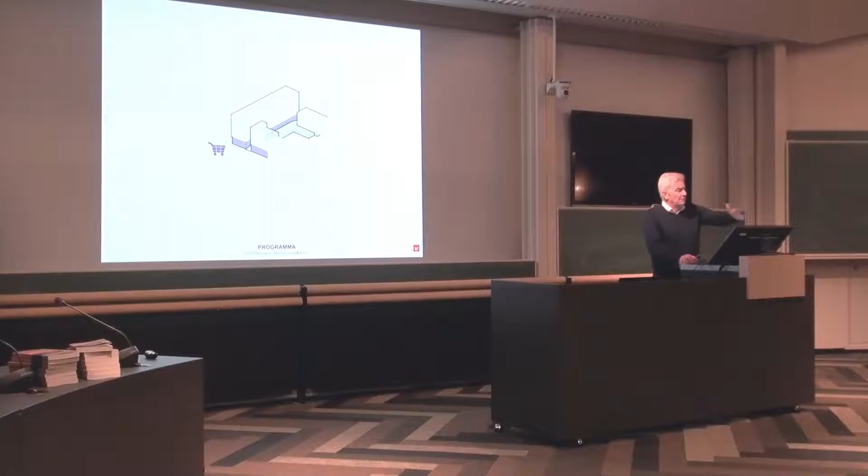And in this green area, everybody should meet everybody. Then we have a commercial plinth, so we want to have some functions down there for the people who are living upstairs.

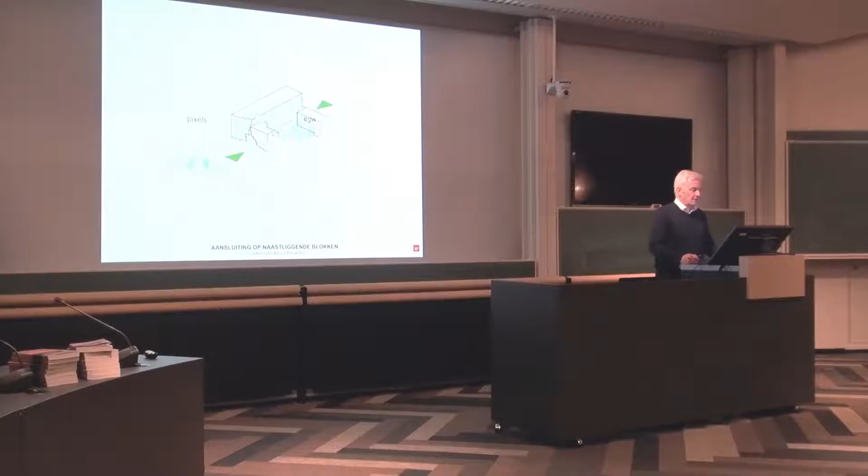Then we want to separate the bikes and cars from the pedestrians. And we need a connection to the blocks beside. And then we have different kinds of housing and apartments.

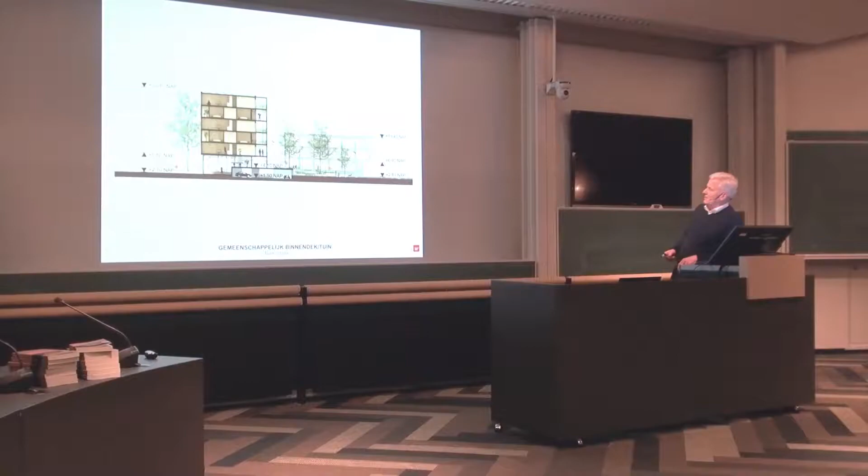Here you see the section. You see the parking, and the parking is half in the ground. So we can use this as a kind of mezzanine in the commercial plinth, so that we can combine this. Of course, it's energy neutral, and these are the floor plans.

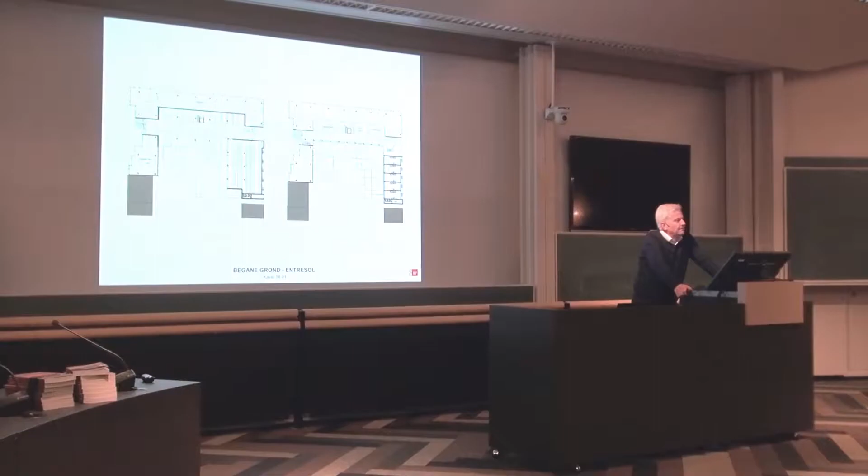I think it's very easy to read this. We did this with a developer who was a custodian. He said, okay, we take care of this block for 30 years. And if the revenue is above 7%, then we started the foundation.

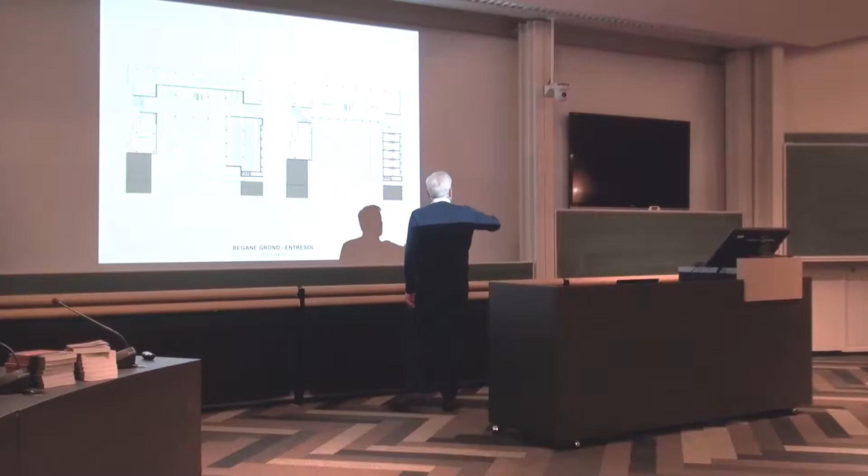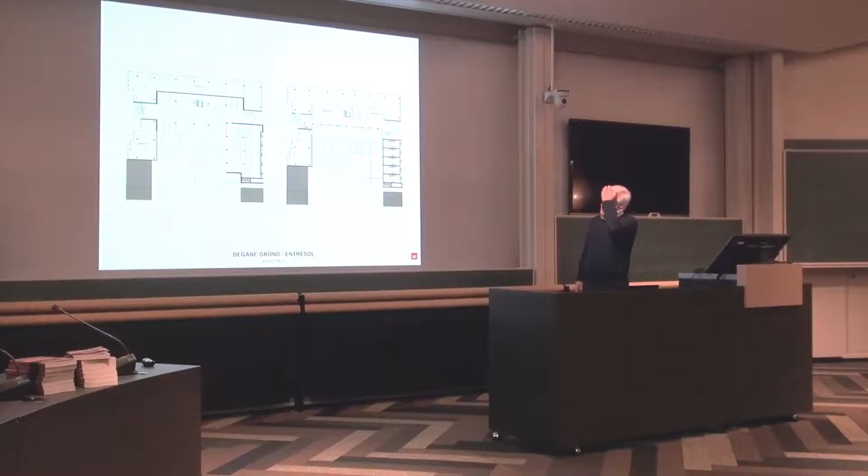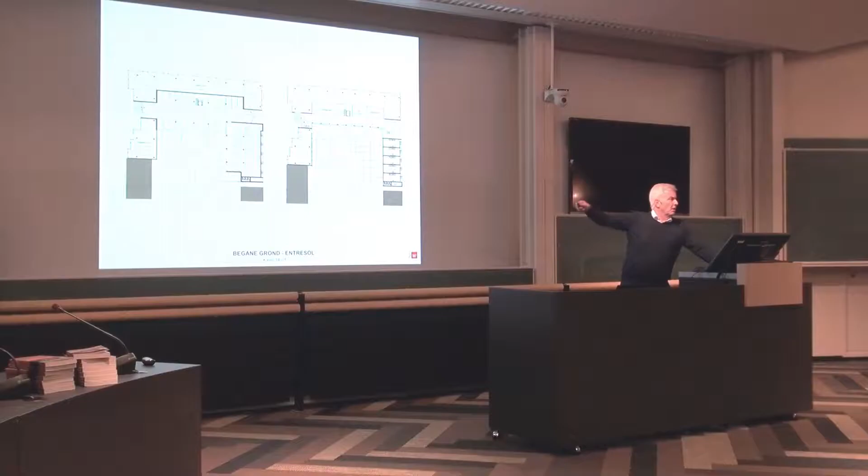So we create a foundation for everybody living in this block. If you're there, you're a member of the foundation; if you leave the block, you're not a member anymore. And if the revenue is more than 7%, 50% of it goes to the foundation, and 50% is for the developer. So they earn money in this block, and then they can create more and more value through time because the revenue is higher.

So we have different kinds of apartments. These are modular, a kind of modular system. Of course, the city, everybody talks about circular, whatever. We all use these words and mostly don't know what they mean. But now everybody is circular, and they said, okay, so we have to serve all these aspects.

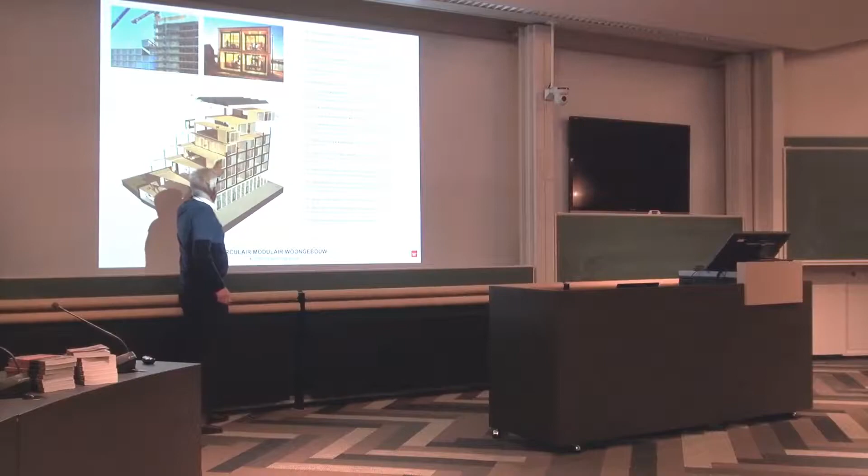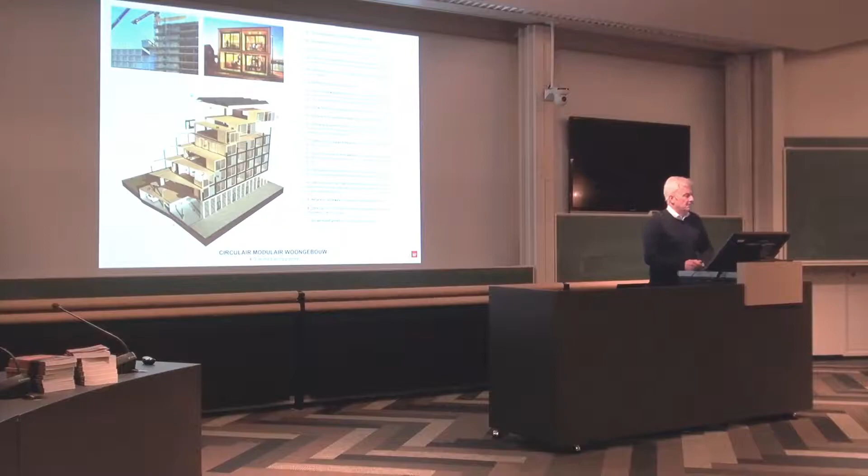And here you see the system. It's a modular system, so it's a wooden construction with a concrete floor, because of the fire regulations. And these are all the different things we realized. So it's a very simple system.

This is from the inside. This is from the garden side. This is from the outside, and this is the entrance. You see here the commercial plane, and here you enter, and here you can go through the block, through the green area.

The EPC is here minus 0.34. So this is far away from what you really have to do right now.

Now I come to another project, a very small one we are just working on. It's called Bird's Eye, a kind of watchpoint for birds in Haringvliet. It's in the southwest of the Netherlands, and it's a Droomfonds project.

And you see, it's a beautiful landscape. Of course, to make a building here is not a good idea, because then you destroy the quality you're coming for. We have beautiful birds here, the Grote Stern, and they come from very far in the north, and then they have a break here, and they put their eggs, and then they move, and then they go to the south of Africa, and then they go back.

So they're halfway here, so it's a very famous point to have a look at these beautiful birds. We have different other birds here too, so we should create something for all these kinds of birds without destroying the landscape. And then it's the question how to get there.

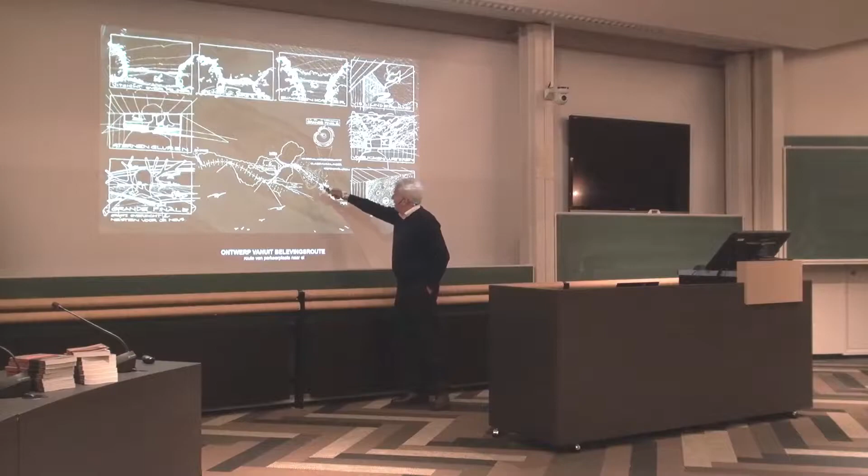So these are the drawings. This is the island. We put it here on the end of the island. So we have a tunnel here. You go through a tunnel so that the birds don't feel that you're there. And then you end up in a very special construction.

And you will end up here in the egg. You see here, this is a tunnel, and this is a harbor. So the entrance is somewhere in the harbor, and then you just go through the whole area, and then finally you will enter a very special building. The very special building is an egg, so you have a lot of experience on your way to the egg. And this is an island where the birds are, so you come very close.

This is the elevation of the building. And of course you're using all kinds of different natural materials.

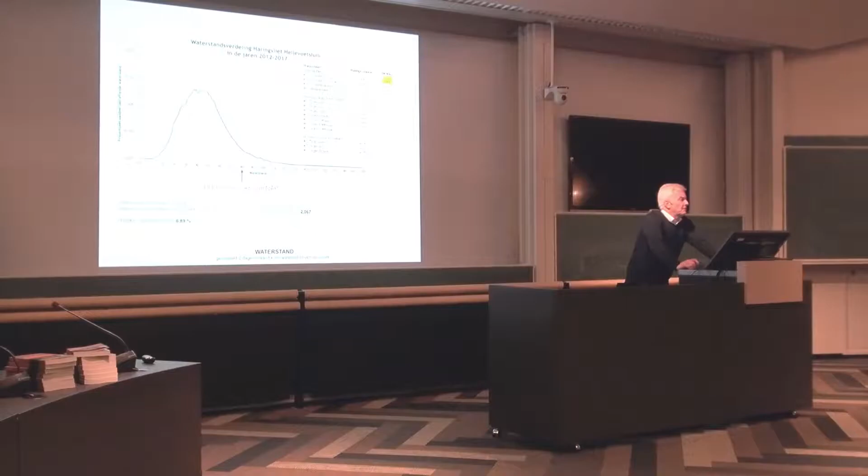Then we have the point, so when can we make a building? What is the best time? What about the water? Because the water is moving. So we have to finish the building now in, I think, 10 days. And we'll open the building on the 30th of March.

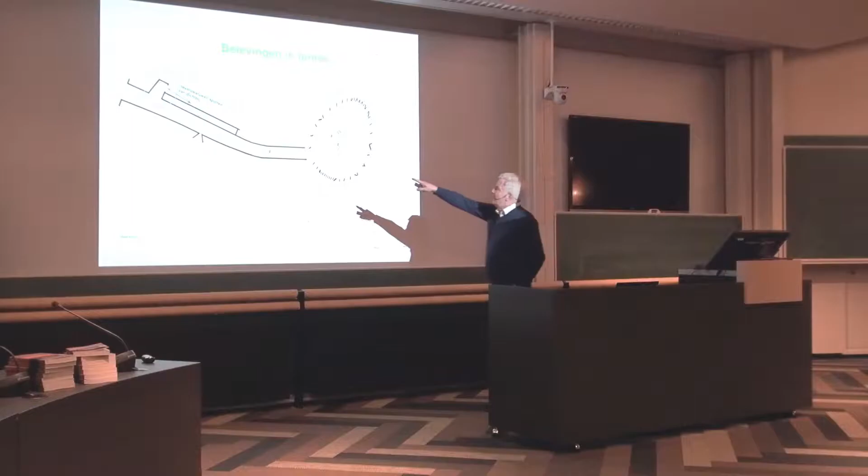But the question is, how can you create a building there? And these are the special places for the birds. They are here, they are in the tunnel, so you can have a look here. So you come very close on one side to the birds.

So opening, this is the section, this is the tunnel you go through to get to the observation area. And this is the observation area. We have a platform, a small stair house, a bank you can sit in. How can you create this and have a look at the birds without disturbing them?

So we said, okay, let's make an egg. And we create a kind of nest where we put the egg, and the nest is here. Down there we have water, and then we make this kind of egg, and in the egg you have a platform, and then you can have a look at the landscape.

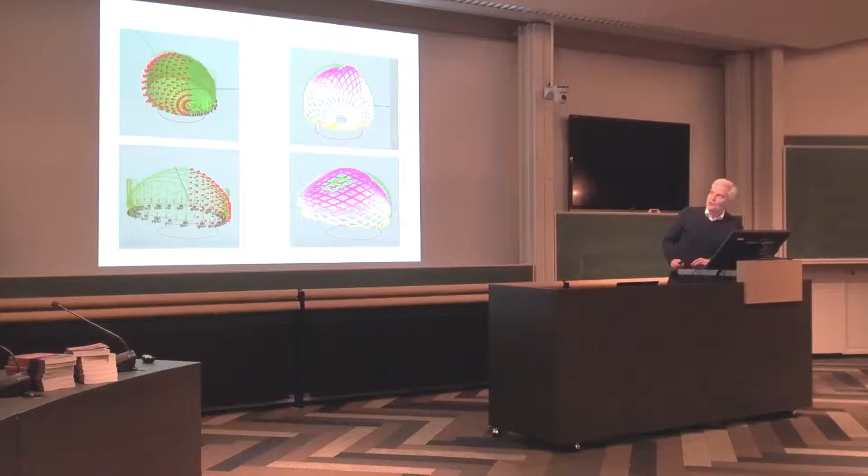It's very interesting if you ask a German construction company to look at Dutch constructions - mostly they say this is really impossible, that doesn't work. If a Dutch constructor looks at a construction from the Finnish people, they say it doesn't work, it's not allowed. So we worked with the Finnish construction company, and they allowed everything, and we ordered the whole egg in Finland. So this is the construction, this is the egg, it's still an artist's impression.

I think we ordered 1,100 of these wooden stakes. They're all numbered, they all have a code. They were cut in Finland by a special computer program - it's a kind of Lego system. They put it on the boat and bring it by boat to that place, and then we have to build it up.

So you see here, this will be the island for the birds. This is our working site. Here you see the tunnel - it's on the ground, and then we fill it up. The platform, and then we start the Lego system. And then you see here, these are the connections. It's a completely dry connection, so you can disassemble it at every moment.

So this is the front, and now you can imagine the egg growing and growing. This is a path in the building. That's the egg from the top, and now we have to cover it up. And now you see this is a place where you can have a look at the birds. It's very small, but there can be a lot of people in the egg, and they are not seen by the birds, so they can have a look outside.

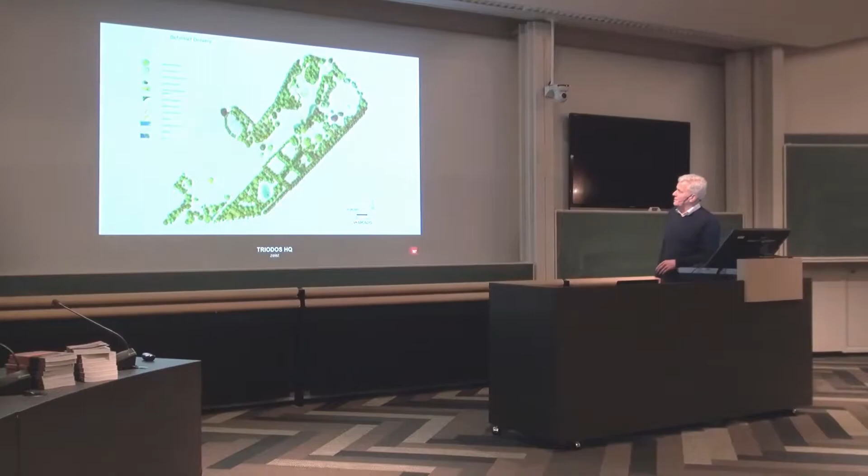So this is the whole site. I think there's a pointer here. So you see here, stop. Oh, here... it's not working?

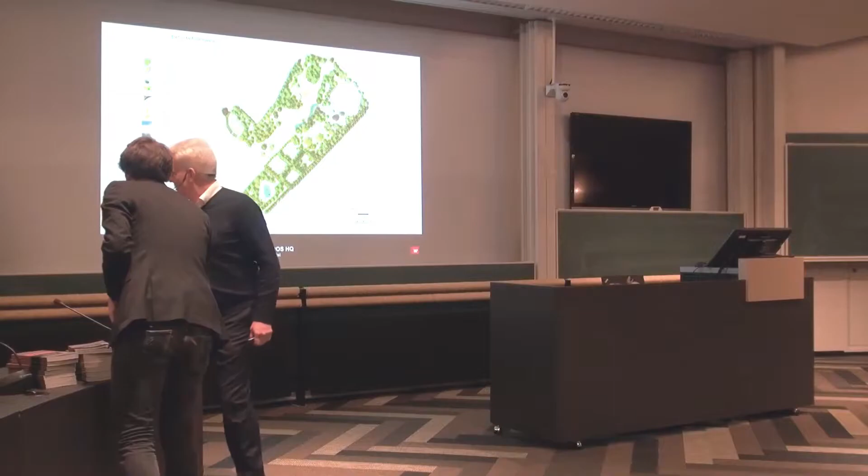It's not working? Okay, now then I try this, okay.

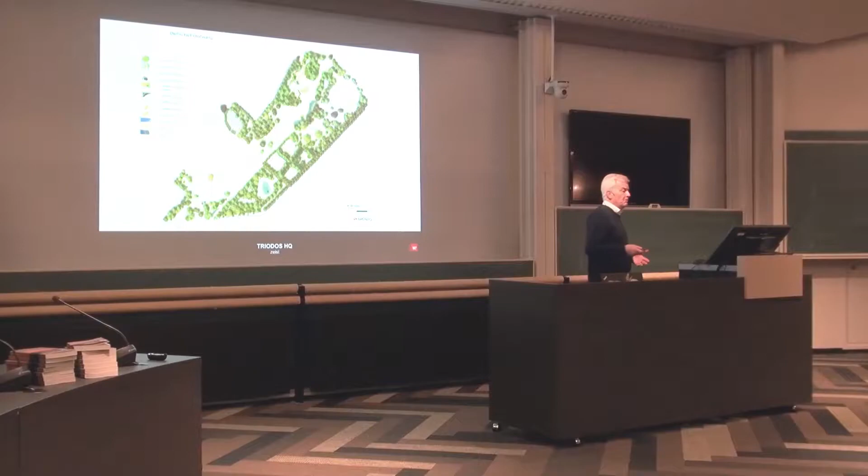So this is a bank building, this is a parking area, and this is the whole site we worked on. We made a whole program because the Triodos Bank is coming on that side. This is a little bit about the design process.

We try to find the person who wants to stay there on that side. And now you see the building, and we designed it because we have a lot of animals here, so we have to take care for the animals and for the trees. That's because of the different height of the volumes.

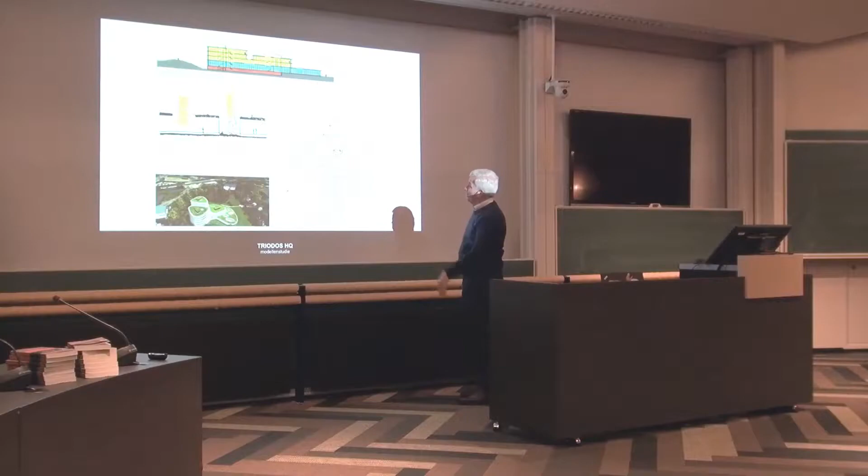This should be the atmosphere in the building. And then we have 3 levels: the social level, the public and the private level, where visitors can see the people who are working there. Upstairs it's more private, just for the organization. Down there we have all different kinds of functions.

But the question was, in 2011 we had the crisis, and the CEO from Triodos said, Thomas, we don't want to have a regular building, we want to have real estate from the next generation, real estate 2.0. We have no clue what it is, but if we don't do this, it's not a good idea that we get a new building, because there are so many empty buildings around here, and everybody's asking why don't you use an empty building? They said, we want to show what is the next step in the world of real estate.

In fact they are all the same, but the interior is completely different. And the interesting thing is it's all wood, a completely wood construction. So everything underground is concrete, and everything above ground, nearly 90%, is wood.

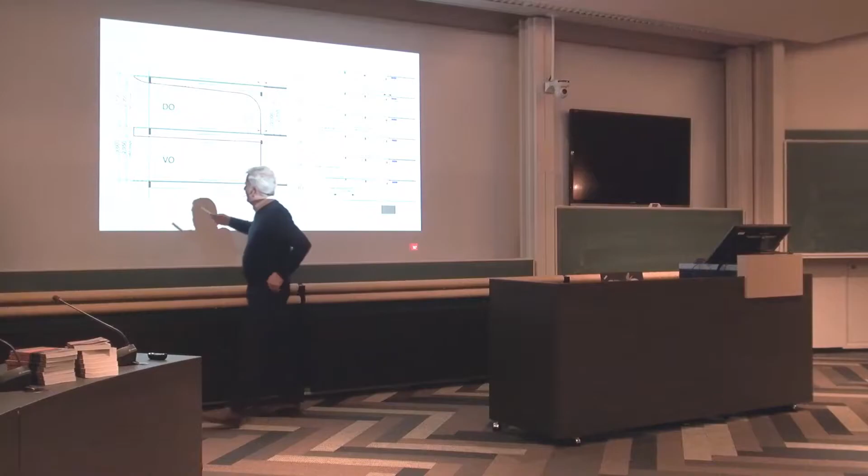That was really very interesting. So what does it mean to make a wooden building? This was the preliminary design, a kind of traditional construction.

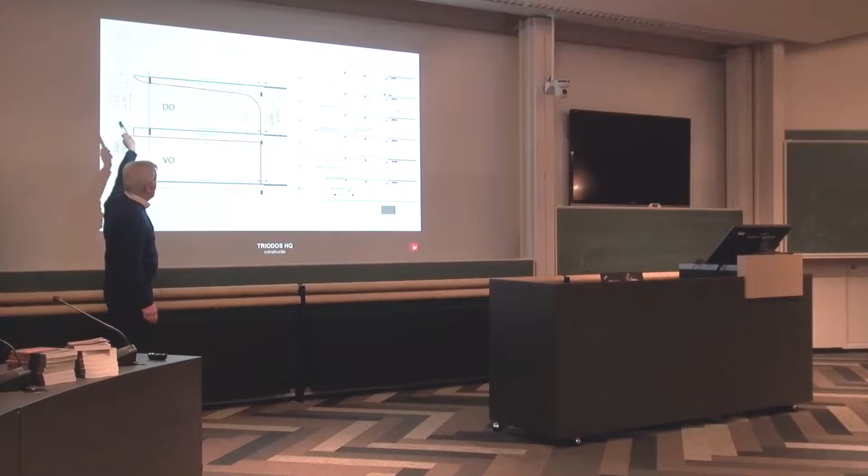Now this is the next phase, so we have a wooden construction. We said we want to eliminate concrete as much as possible in the building, and we want to bring in wood.

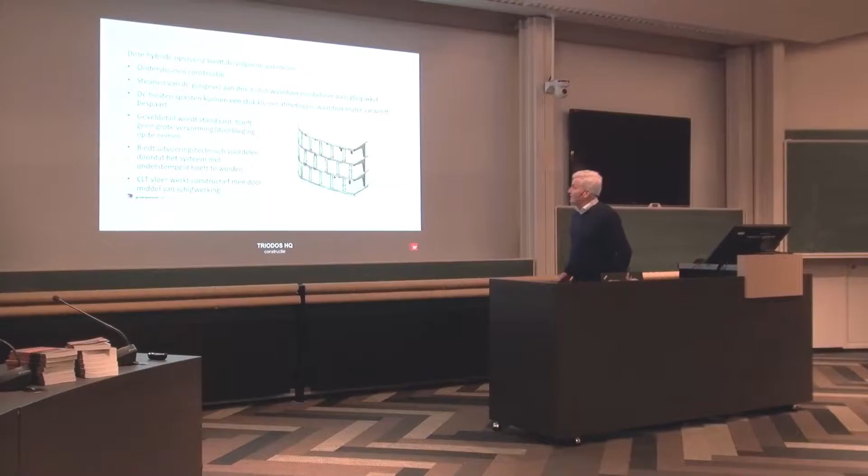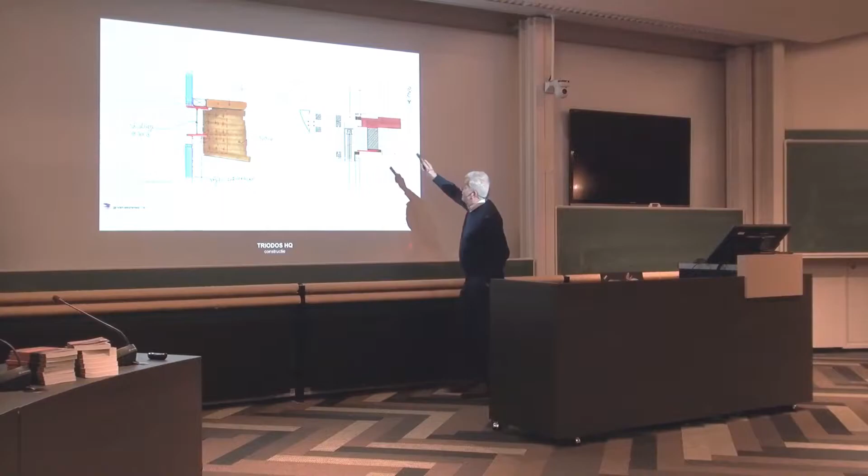In fact it's a kind of hybrid system, because we need some steel in the elevation because of the movement of the wood, since even all the floors are made of wood. Even the place where the elevator is is done out of wood, and this is one of the details. So this is a wooden construction, fixed by a beam of steel going around, part of the wooden construction. I think we have 400 of those elements.

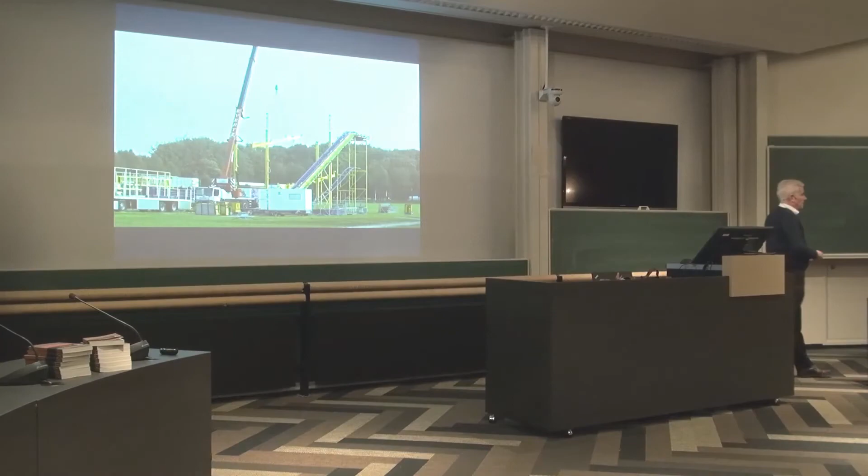Install, use, recreate. Install, use, recreate. Everything is temporary, only the consequences are permanent.

The sun makes finitude in nature infinitely available. Data makes finitude of materials in the circular economy infinitely available. In a linear economy, materials get wasted, finitely available: mining, construction, consumption, demolishing, waste, depreciated buildings, materials without an identity.

Finitude is final. The earth is a closed system. Once it's gone, it's gone. In a closed system, all materials are limited editions.

Let's go back. The final destination becomes the starting point. Hindsight becomes forethought. Write off becomes write down. Anonymity becomes identity. Worthless becomes valuable. Buildings become material depots. Real estate becomes mobile estate. CO2 production becomes CO2 reduction.